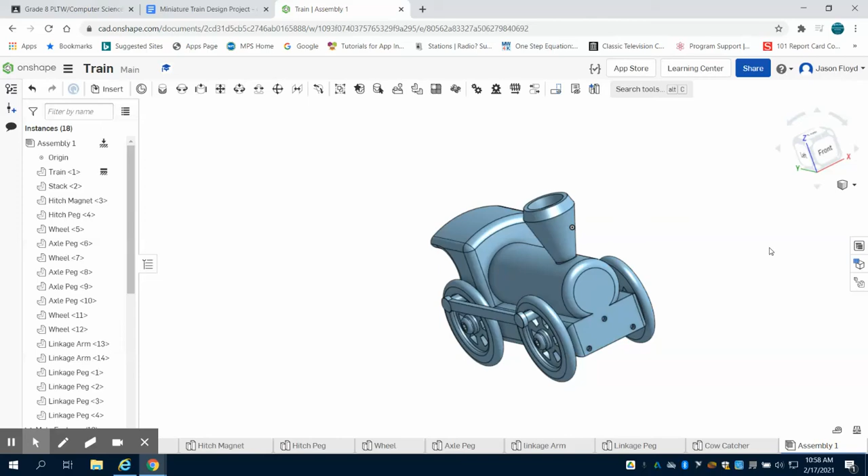In the previous video, we put the linkage pegs in, and now we're going to move on to our cow catcher on the front. I've created a part studio for this already. I'm opening it up, and I'm going to create a sketch, and place it on my top plane. I'm going to grab my line tool and make a 1.8 inch line.

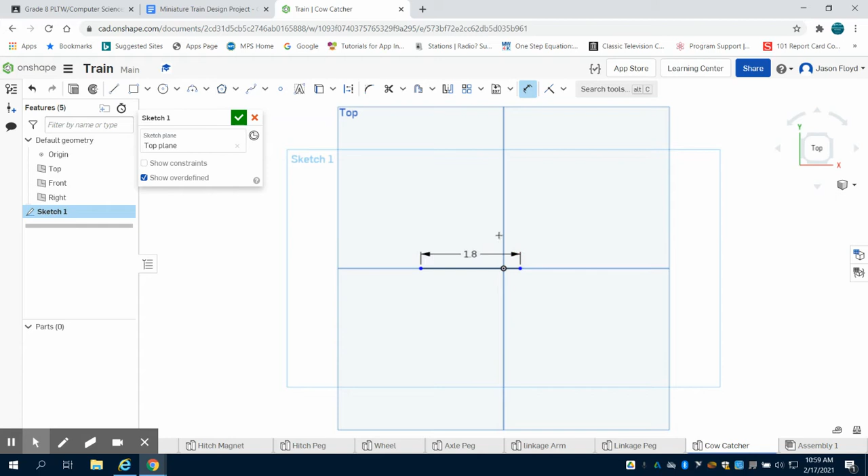Now I want to dimension this line so we're centered from the edge to the center point here. Half of that, so it's centered, is 0.9. I'm then going to grab my line tool, and on each side I'm going to go up 0.25 inches.

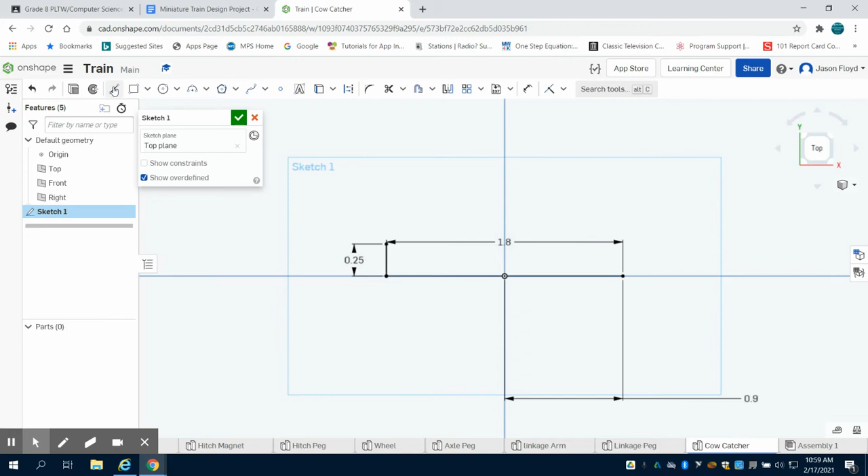Now the next thing I'm going to do is come to my point tool. I don't think that line is straight, so I'm going to delete that line off and make sure that it's straight. So I'm going to do a line that's 0.25 inches. There we go. I'm going to come up here and grab my point.

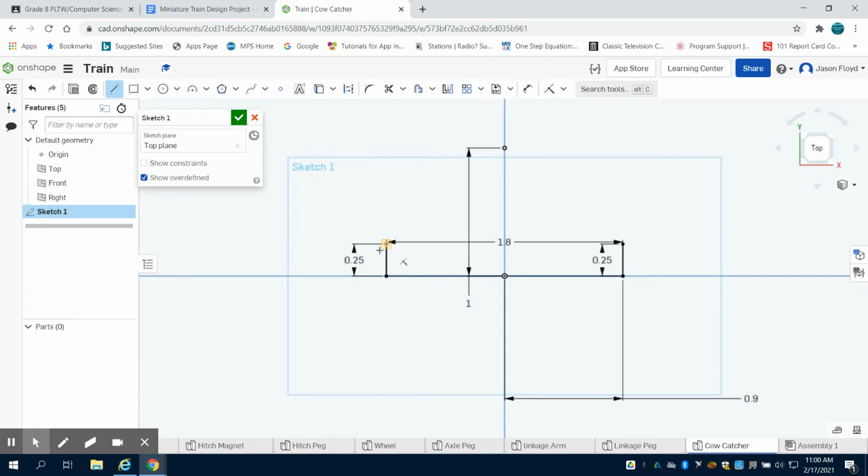I'm going to put one right down in the center there, and I'm going to dimension that to the start here, 1 inch. I'm going to grab my line tool and connect to this point, and from there to here, which gives me that base for that cow catcher. I'm going to close out of this sketch at this point and leave this sketch alone.

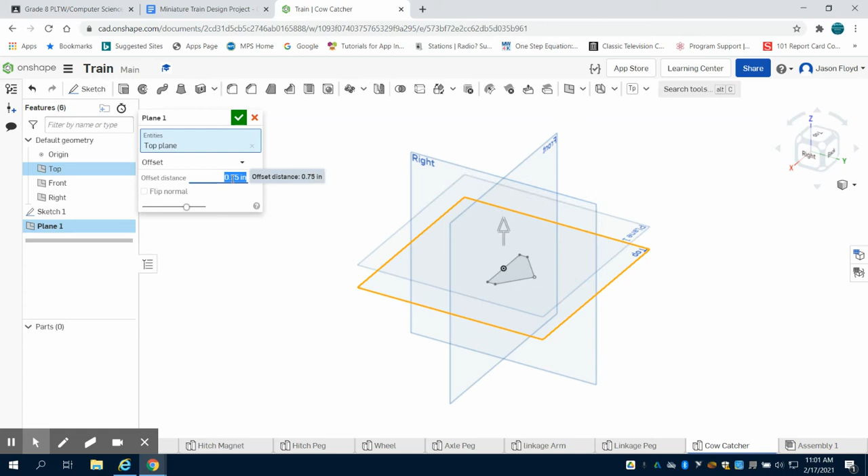So what we're going to do now is gain perspective, and we're going to place a plane down on the top, and the height of this part is 0.75 inches, so I'm going to offset that plane 0.75 inches.

I'm going to come around to the top of this, and place my sketch down on that plane. Now I'm going to go through that same process I did, but just a little bit smaller dimensions. So I'm going to draw a line, and this line is 1.2 inches.

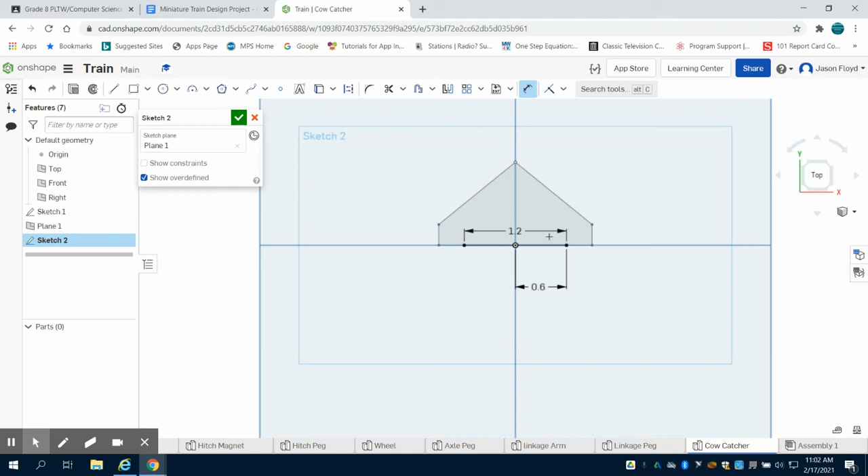So I'm going to grab my dimension tool, and from the end to the center, I'm going to dimension this 0.6 inches. The sides of this are the same, so I'm going to go up 0.25. There we go. I'm going to do the same thing on the other side.

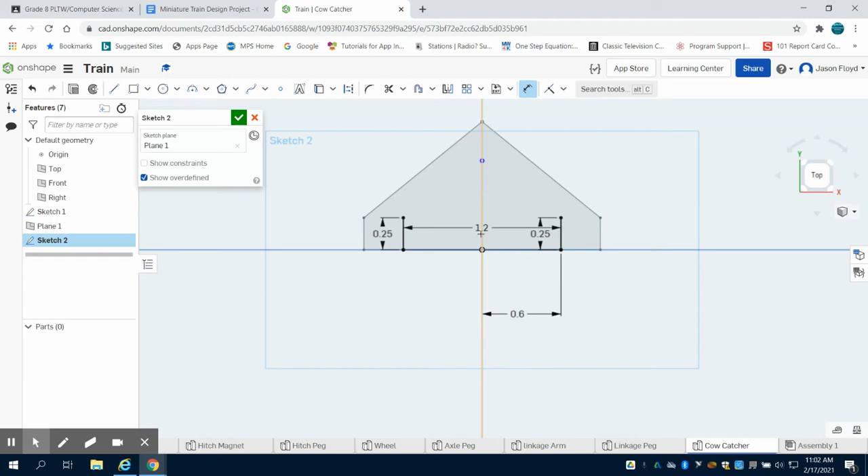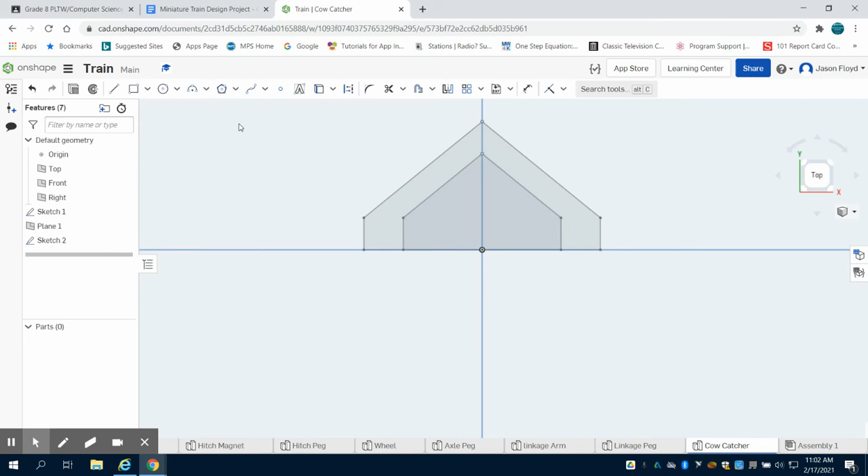Now, just like before, I'm going to grab that point tool. I'm going to place it right in line with the center there, and dimension it from the top to the start of this, 0.75 inches. I'm going to grab my line tool and connect, and then I can green check mark it, and my sketch is done.

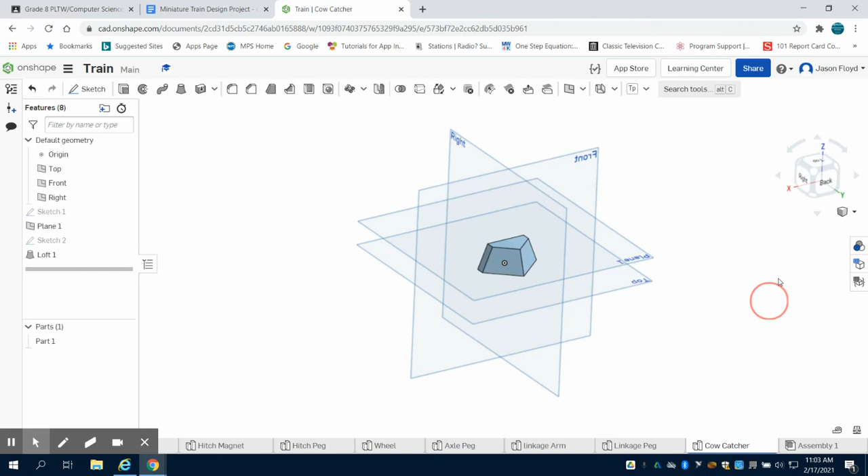I'm going to gain perspective on this now, and come over here to my loft function. I'm going to choose my sketch 1 and my sketch 2 to loft to, and then green check mark that, and you can see I have that formation, the beginning of that cow catcher that we've seen.

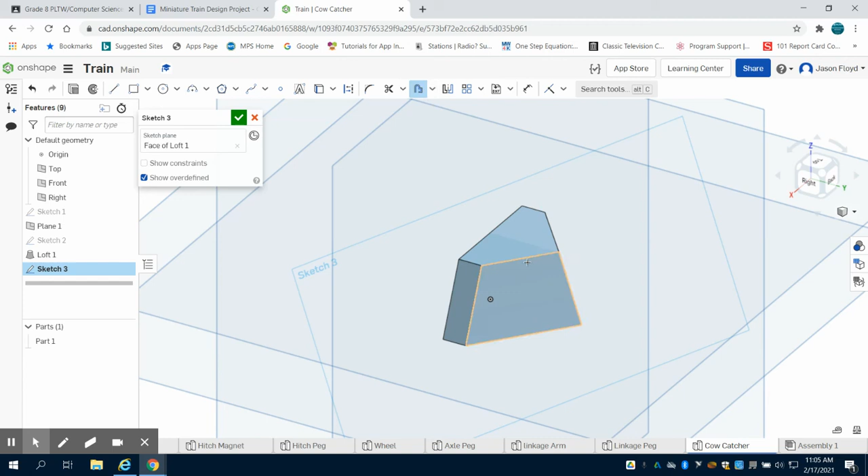So now I'm going to come and rotate myself around on this, and place a sketch down on this angled face right here. And what you're going to notice here, I can offset this. So I'm going to offset this outer hexagonal shape, and change it inside, and the amount that I'm going to offset it from the side is basically 0.1, allowing me to copy that shape that's on the exterior there.

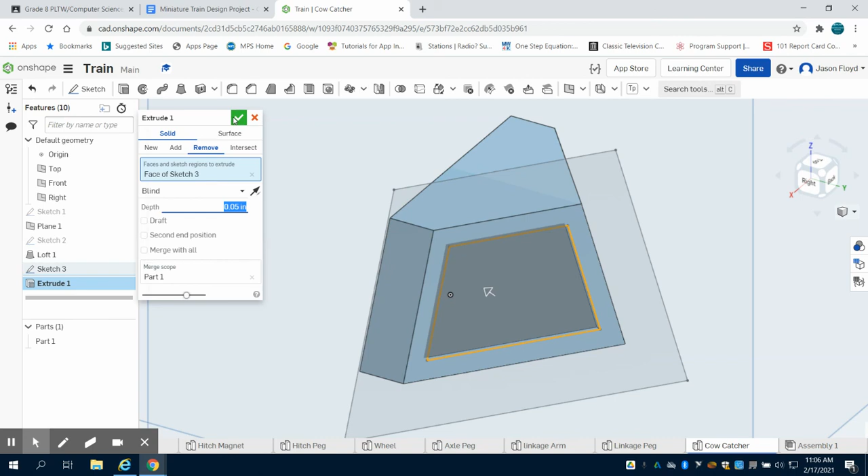So now I can come to my extrude button, choose this face. We're going to do a removal, and it's 0.05. So that's how I get that little cutout there. Now I can do the same thing on the other side.

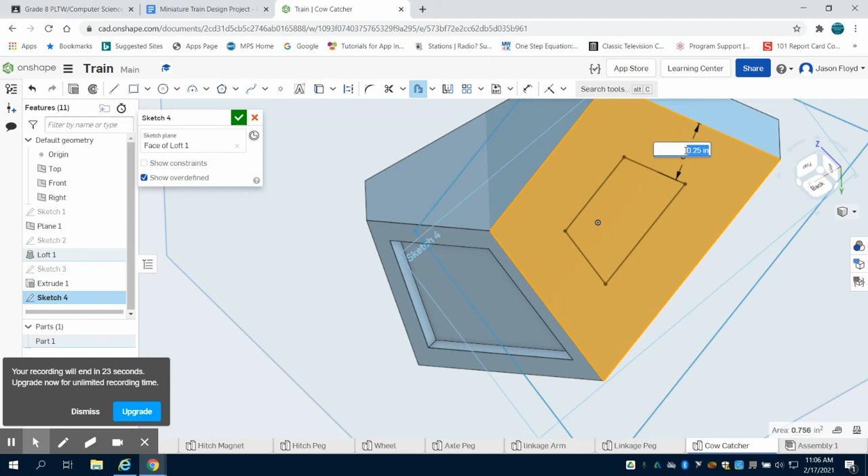I'm going to put that sketch down on that angled face. I'm going to come to my offset button, choose this face. Now obviously I'm going to flip that arrow again. I'm going to change my dimension here to 0.1 offset. I can green check mark this, and then click my extrusion or removal at 0.05 inches.